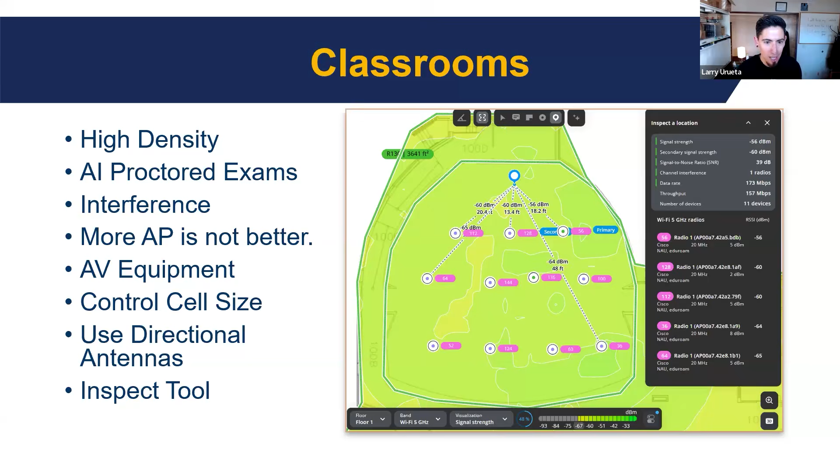I will say this used to be a bigger concern in the past, but Ekahau has made it so easy now that you really don't have to think twice about it. Whether you have a floor plan with walls drawn or not, you can still take the Sidekick out. If you do a proper survey and measure both sides of the walls, which I'll show in a demo later on, you can get pretty close to the attenuation of that material without actually having drawn it in.

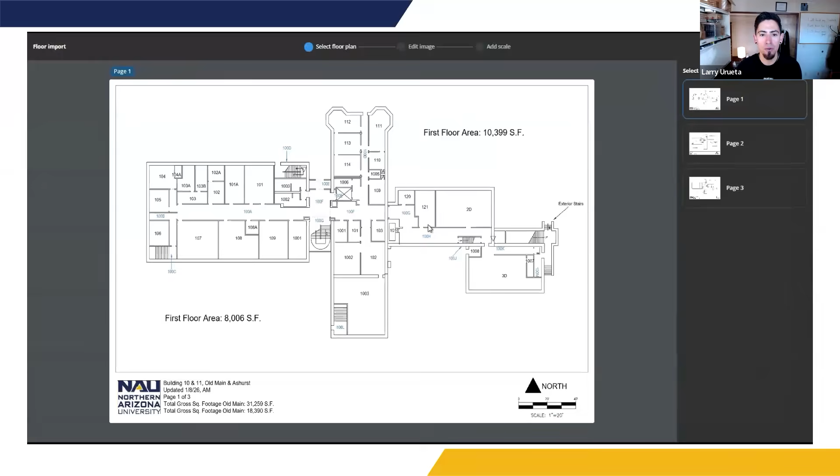Let me show you a quick demo of how quickly you can take Ekahau AI Pro Online and start from scratch with just a PDF, creating a single floor plan for the same building I just showed you, using the AI software to draw on the walls and get a quick at-a-glance view of a wireless deployment.

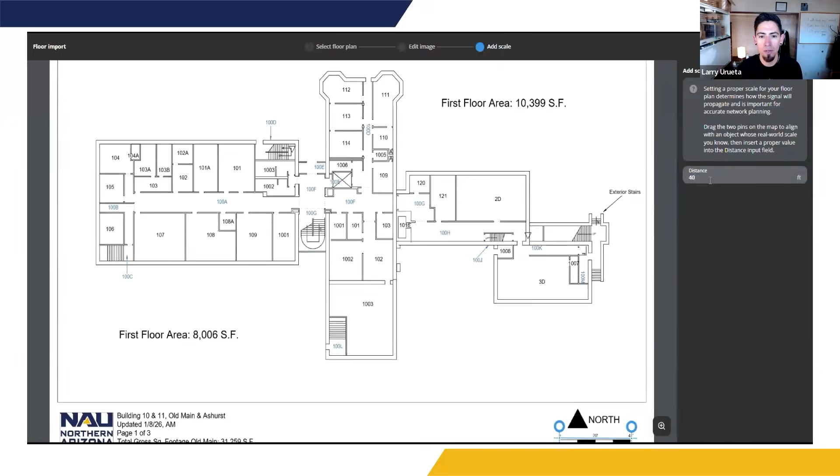This is sped up to be 2 times faster for the webinar, but you can tell it's not that hard. You just need to make sure you're setting your scale, and then let AI do the magic on the back end, detecting the walls, which is about to finish up here.

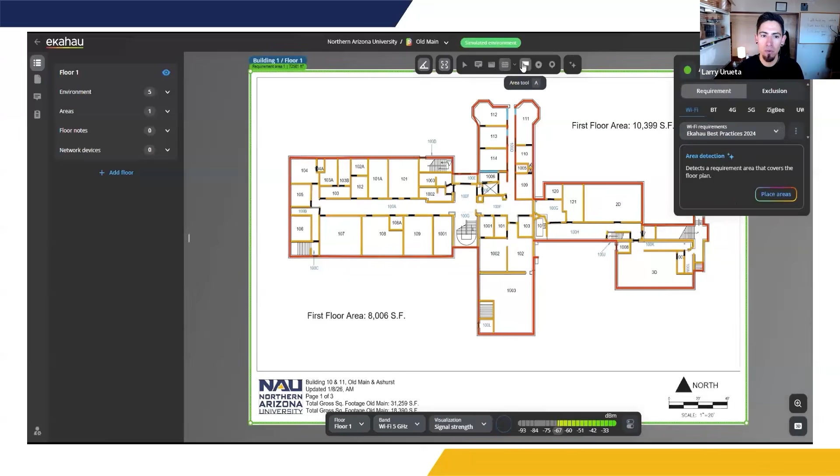Now, clearly you would have to validate that and take your survey, the Sidekick, out to do a site survey just to be sure. But even adding access points is really cool, really easy, and you have a wide variety of selection to choose from.

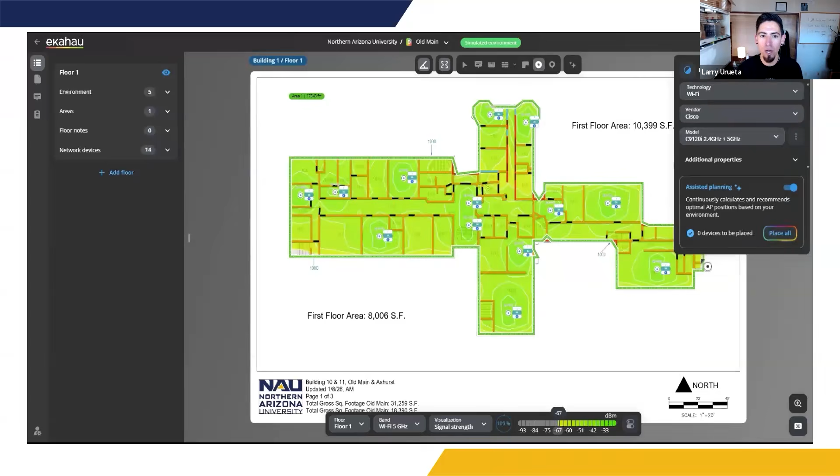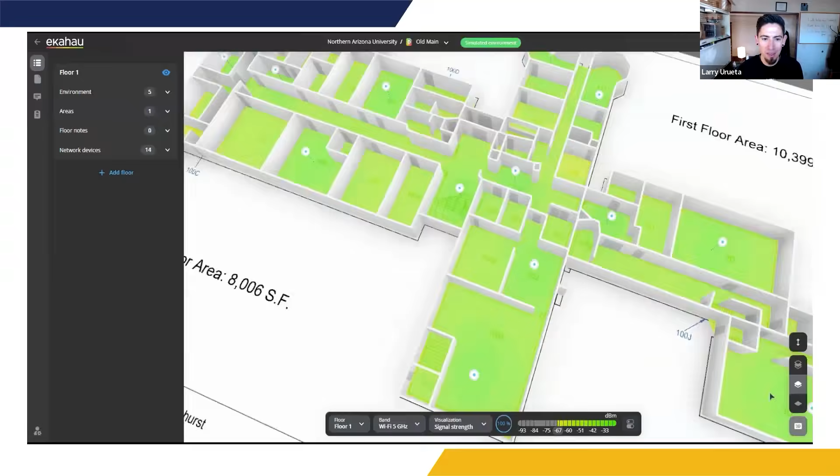I'm just making a couple adjustments there, and that looks pretty good. And there you go—a nice little 3D view of what the first floor of that building would look like in just a few seconds.

So really neat if you want to simulate your existing network or maybe future Wi-Fi 6E, Wi-Fi 7, Wi-Fi 8 access points. Definitely leverage the Ekahau tools to help you with your designs.

So we talked about exterior aesthetics. I should probably have mentioned that being a historic building does limit us on what we're able to do as far as modifications. There's not a lot as it relates to mounting that we can do without seeking approval.

But for better or worse, for aesthetic reasons or otherwise, the previous wireless engineer thought it would be a good idea to install the access points above the ceiling, which is very common. I would not recommend designing it this way.

As you'll learn in some of the design 101 training classes, you definitely want to make sure you expose the access points or bring them below the ceiling grids. Do not add attenuation to the access points, and you probably don't want to install an omnidirectional at such a high height. You want to leverage external antennas or directional access points.

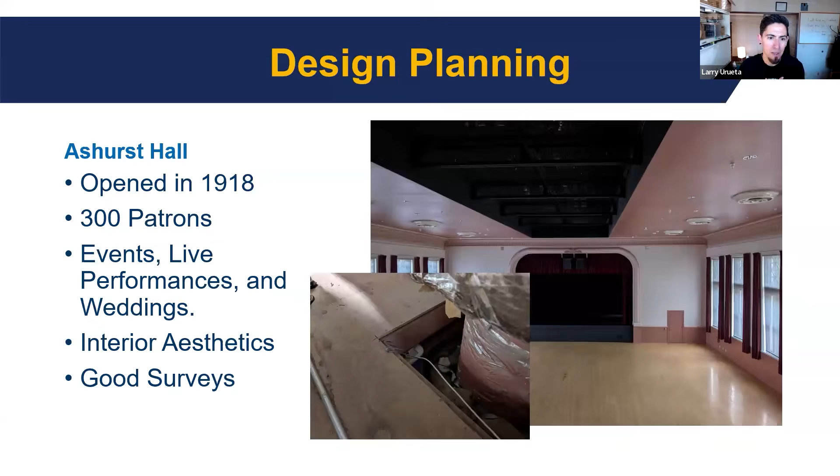This one gave me a good chuckle, and I just wanted to share some of our blunders. But I didn't do it, I promise. And I would never do that—I only design good wireless networks.

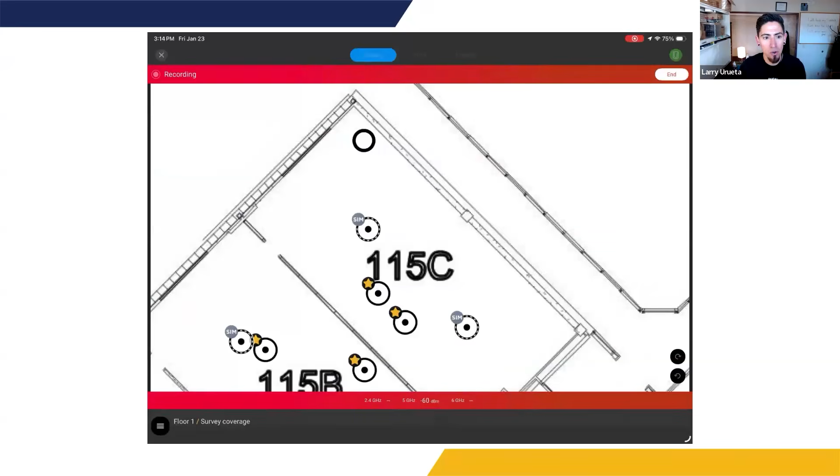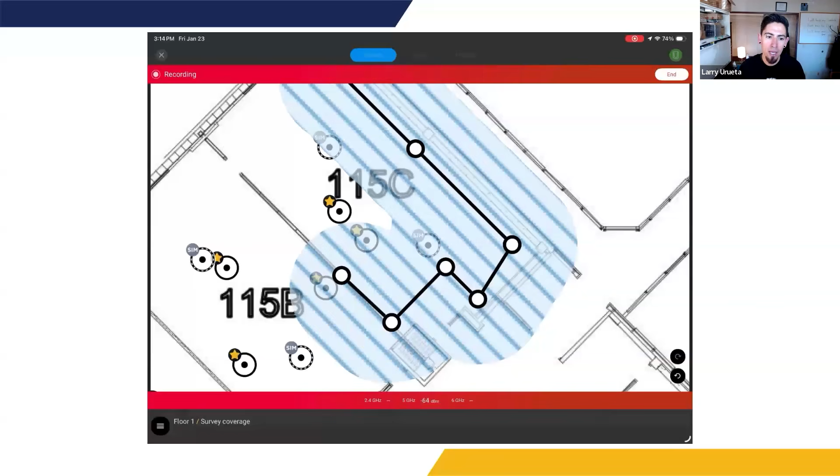Once you do have a good wireless network, the next step is to do a site survey. When you have an environment where you've deployed access points and want to get a feel for what the wireless looks like, it's crucial to perform a good survey. What defines a good survey versus a bad one is making sure you walk every corner of the building where you expect wireless to function.

In this case, just to show you how easy it is, take an iPad, slap on your Sidekick, and walk just one room, just to give you an idea.

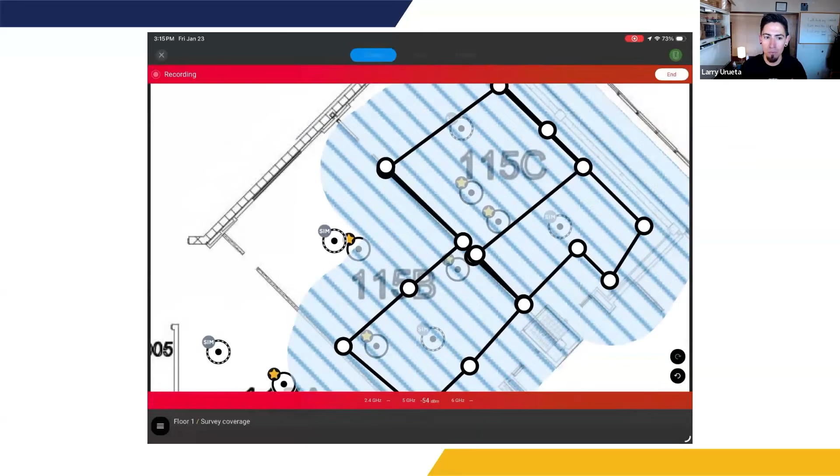This is a space near the food court for our university, one that I've performed several site surveys on, but recently did a refresh by installing external access points to help create more microcells within the room and help with capacity and density, because this is a large conference room with accordion walls that can open up to create sections of smaller conference rooms within it. So we took it upon ourselves to refresh it. I did a site survey, and now I can come back to my office, sit down, grab a cup of coffee, and look at all the various visualizations to make sure the wireless design met my expectations.

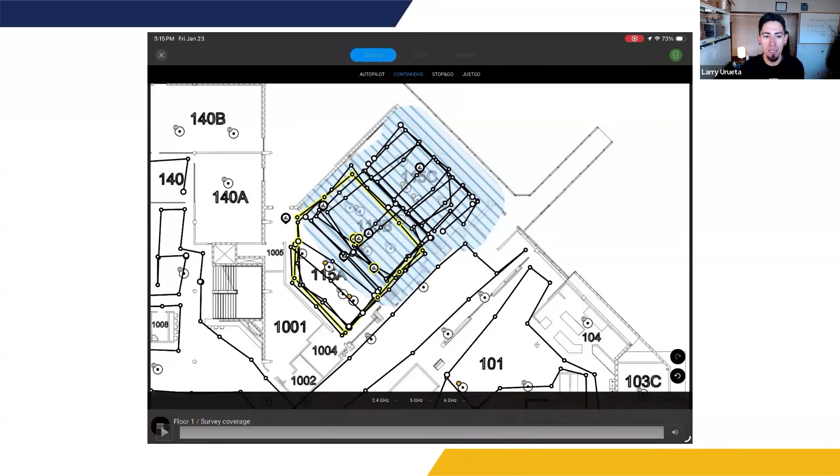Now, some of you critics might notice I haven't walked the entirety of the floor. Good on you for noticing. I would definitely want to walk into every single corner of this building if I have access to it. But this is actually a very busy building, as it's our food court, so it's open year round.

Okay, some of our more dense environments, including our auditorium and our stadium, which I'll show you in the next few slides, you want to make sure you're accounting for capacity. As I mentioned in the previous slide, to do that you want to create microcells, or create sections using external antennas to help distribute the load in these types of environments.

This one in particular is our Ardrey Auditorium, where the Flagstaff Symphony Orchestra performs along with other live events, but is another space where aesthetics create a limiting factor on where we can mount equipment, and also the height of the room and all kinds of different variables limit us from being able to reinforce the wireless. But we were asked to do so.

If we were to really do it right, we probably need to add a little bit more access points. But working in a university environment, we do our best with the tools at hand and come up with creative solutions to make the wireless better.

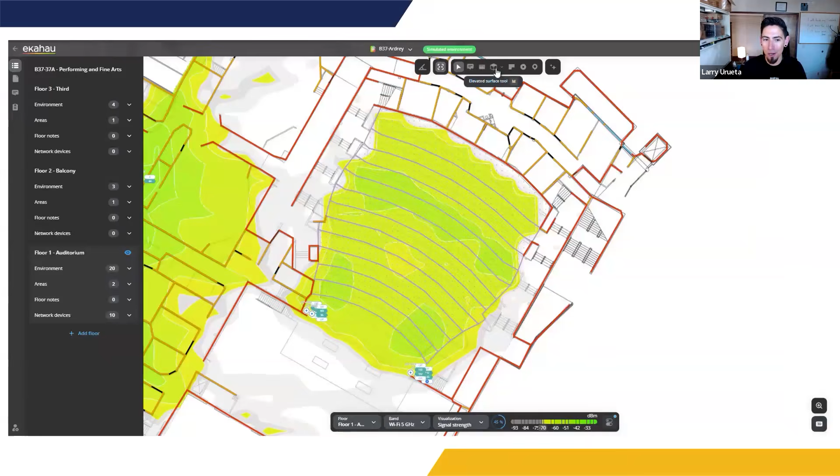In the next demo, you'll also see a showcase of the elevated flooring that Ekahau now has, which I've been really, really excited to finally get access to. You can really design and get an idea of what the wireless coverage would look like, even with a sloped floor environment.

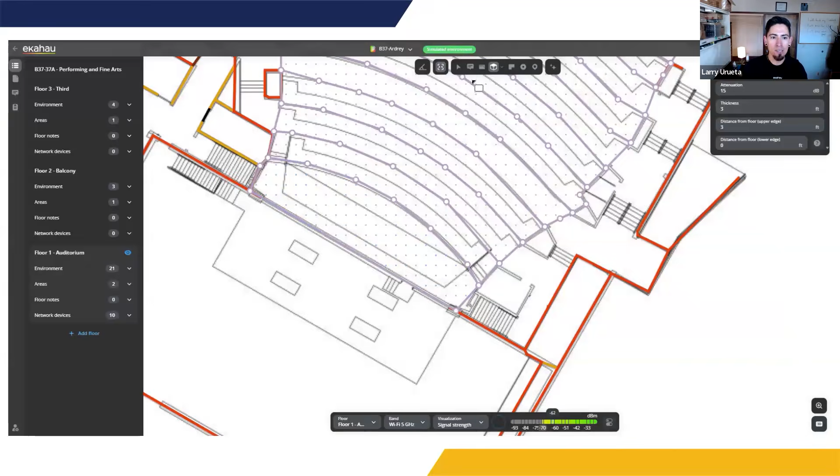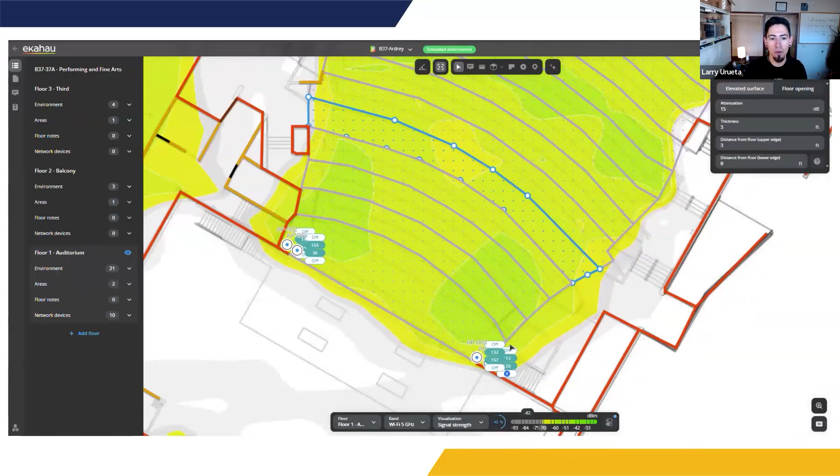This is me just demoing - I've already done all the legwork. I just wanted to showcase a little bit how easy it is for you to take that space, add your access points, and then look at it from a 3D perspective to get a feel for what it would look like. I would then recommend going in and doing a site survey to validate that the design meets those requirements or matches what the software suggests.

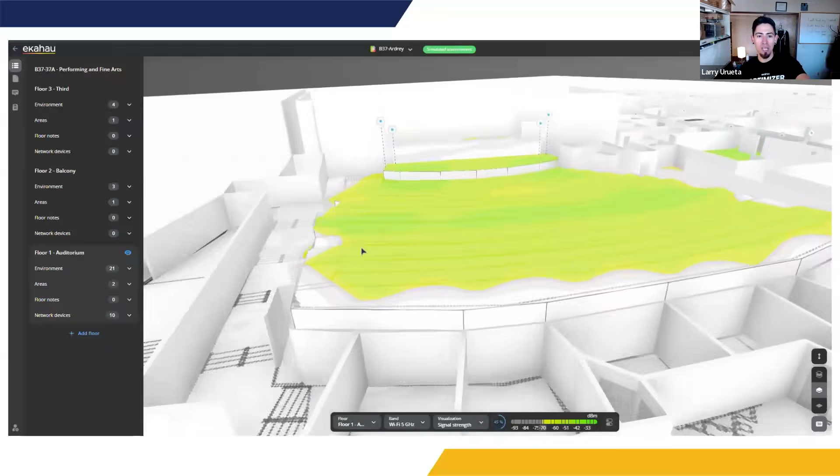But really, really cool to see the sloped seating, I think that's just pretty freaking awesome, I'm not going to lie. There are other types of venues you would use this for, like stadiums, and we'll talk about that next. But I wanted to showcase that and give you guys a quick demo of that environment with the same access points I depicted before.

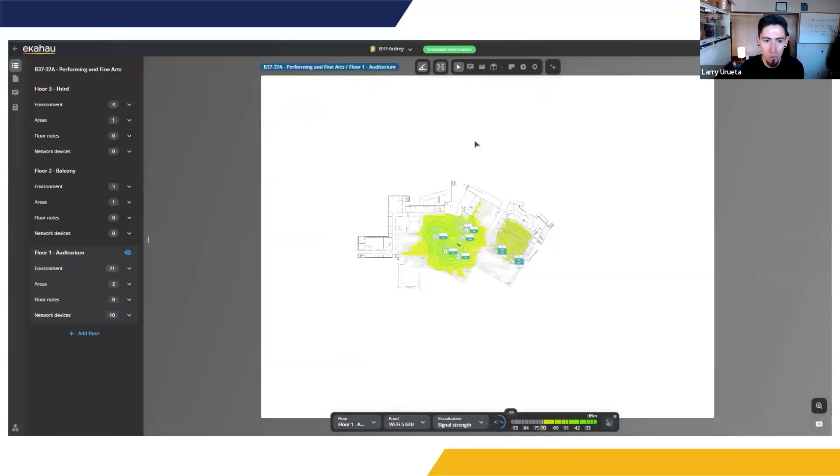In actually doing a survey, it was pretty close to what the actual design suggested. But if it doesn't match, you can go back and make some tweaks. So really, really cool.

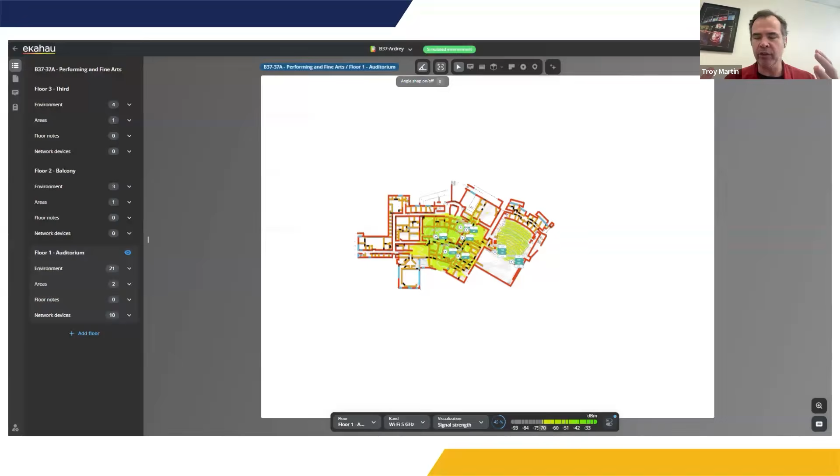Hey, this is Troy, just a quick question focusing on the larger auditorium areas like this. If you had a very large area, what would your thought process be, or how would you address load balancing clients across a large seating area like this? What strategy would you leverage - antennas, features built into the controller, or the access points? What do you do in that situation?

Yeah, I've attended other webinars where there's varying differences in opinion on how you would approach it. You have a few options to play with, like 802.11v, if you want to let the controller help distribute the load.

I side with things that Matt and others have said in the past, using external antennas distributed across the room, assuming you can get away with the mounting locations, even if it's on the wall, and helping focus the wireless from those antennas and access points in specific areas, then naturally allowing clients to walk in and roam to different access points. It can be tricky, but you're mostly limited by the mounts and mounting locations. I'd suggest letting the client decide, as opposed to forcing the client or doing something on the controller side, because that could be met with varying degrees of success. Usually, if you nudge the client in the right direction, they make the best choice for themselves.

Brilliant. And I learned that from you guys. So, all right, so now.

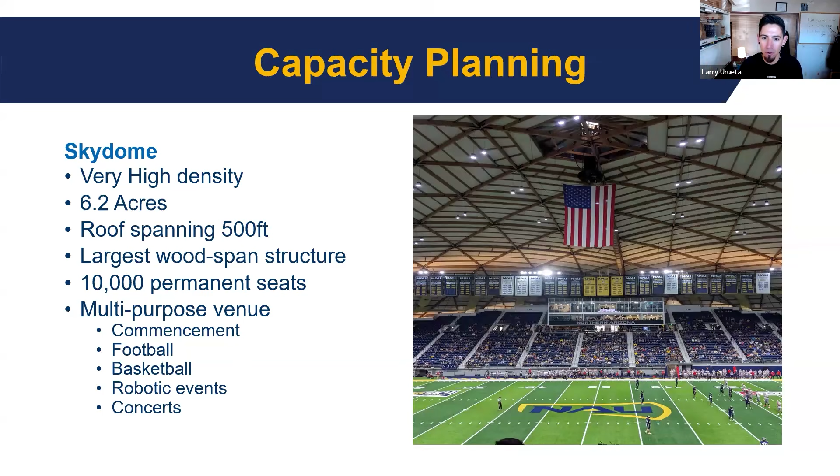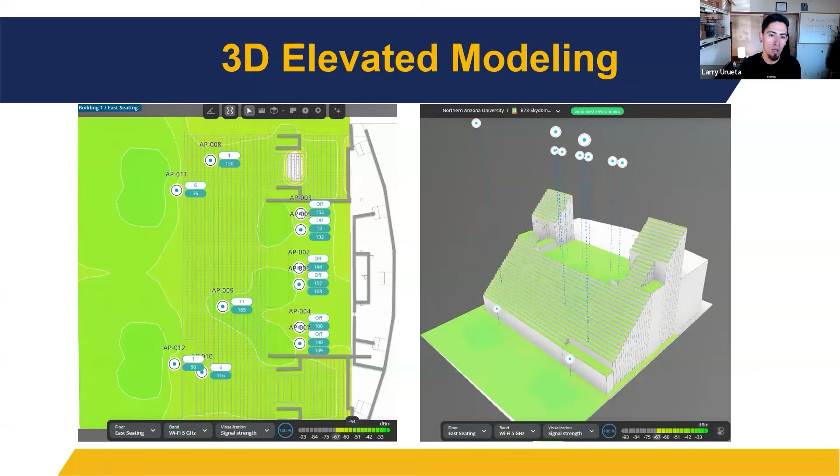But it's a project I'm definitely going to continue to champion, and I'm hopeful we'll be able to complete one day. This was actually one of the reasons - some of you might recall seeing this layout in a previous slide or webinar with Ekahau. I recreated it myself using the elevated sloped flooring just to help drive home the point. Comparing the left image to the right image, which is the same image, gives you a level of confidence that your wireless deployment will do what you designed for - in this case, designing for capacity to handle all the patrons visiting the stadium. So another really neat use case for the sloped elevated flooring.

I think probably one of the most common challenges we see across campus is not just design, but chasing down wireless issues. Without the right tools, without my sidekick, I don't know how anyone else would address it. I don't think vendor tools cut it. If you have some sort of NMS tool that can monitor the health of your wireless network, it doesn't compare to actually having a real world, in-the-moment capture or example that you can work from. That's where having just an iPad and a sidekick comes in handy.

So I use the Analyzer app to detect RF neighbors, rogue devices, and how many access points are deployed in an environment, and whether we should make a design adjustment for that. I would highly recommend maybe moving access points out of hallways. I think that's been said before on these webinars, but I can't understate the value of that enough.

Considering we have students that live on campus year round, mind you, they have a tendency of bringing in microwaves, which adds interference to the wireless infrastructure for our campus. And inversely, in our academic space, we have lots of instructors with shared printers or enterprise-grade printers with wireless automatically enabled. All of these things, when you walk into an environment, just contribute to what I have here is the co-channel contention.